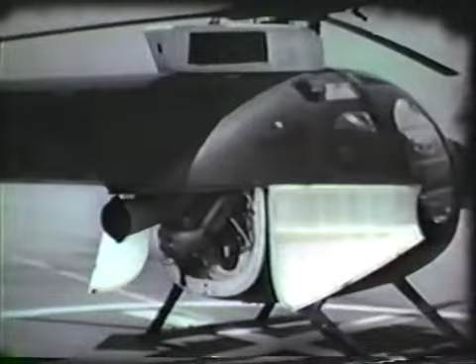The aircraft has clean lines. The teardrop-shaped fuselage is the result of wind tunnel testing to provide minimum drag. Even the landing gear struts have fairings to reduce aerodynamic drag. The clean lines of the OH-6 are part of the reason for its speed and stability. Another contributing factor is the powerful, lightweight turbine power plant.

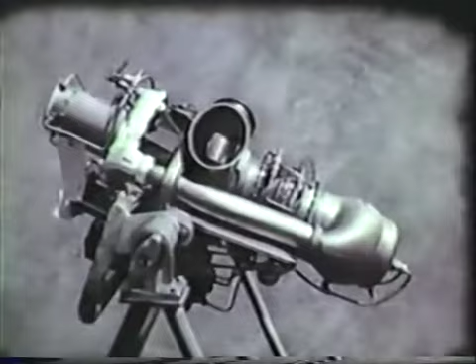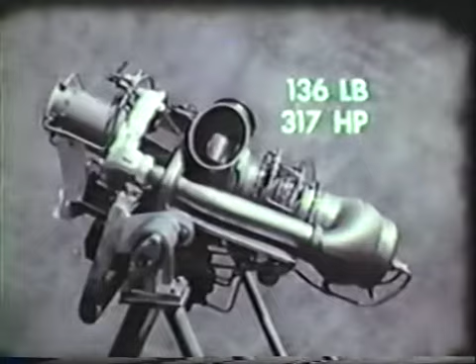The small turboshaft engine weighs only 136 pounds. Its military rating is 317 horsepower, but installed in the OH-6A, it is derated to just over 250 horsepower. This favorable horsepower-to-weight ratio adds greatly to the OH-6A's speed, power, responsiveness, and stability. The engine, like most of the aircraft's major components, can be quickly removed and replaced under field conditions.

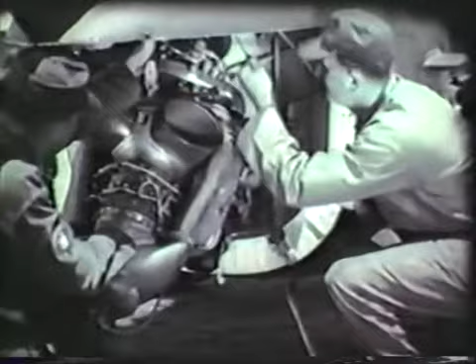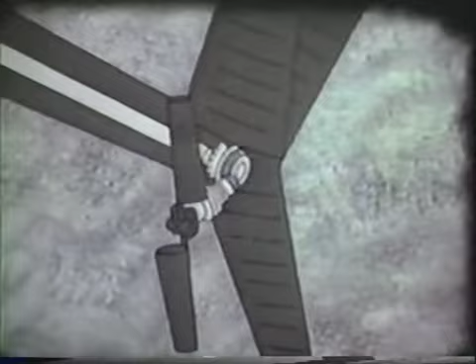The engine's power is not wasted in carrying and operating a heavy and complex main and tail rotor drive system. The engine drives a total of only 4 gears in the main transmission, with 2 gear meshes. In the tail rotor gearbox, there are 2 gears and 1 gear mesh.

The tail rotor drive shaft is one piece, lightweight and dynamically balanced. It has no supporting bearings and no universal joints. The simplicity of the drive system provides light weight, low power loss, and a minimum of maintenance. The 4-bladed rotor system produces high lift with very little vertical vibration and rotor feedback.

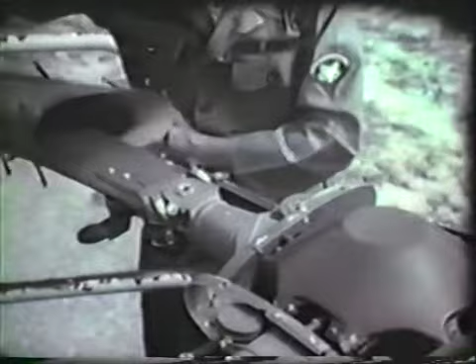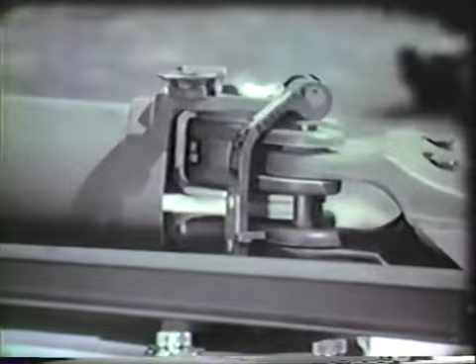The blades are retained on the hub by laminated stainless steel straps. Each of the strap assemblies holds 2 opposing blades. These blade retaining straps have many unique advantages. The principal one is that they provide both flapping and feathering without the heavy joints and thrust bearings used in conventional rotor heads.

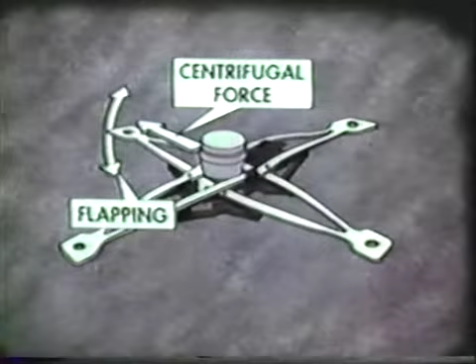Since much more force is imposed by flapping than by the centrifugal force of blade retention, broken straps will usually cause an out-of-track blade condition long before there is any possibility of blade loss. Thus, the blade retaining straps provide full articulation, freedom from joints and bearings, with minimum maintenance required.

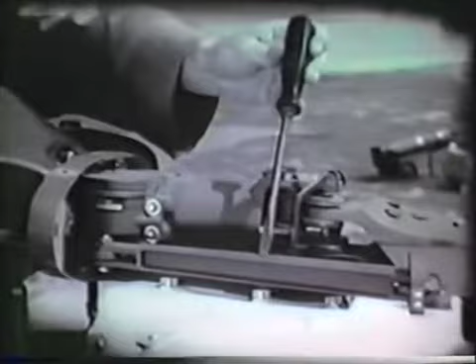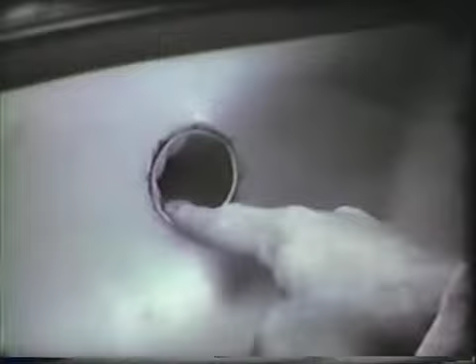Each of the blades has a friction-type damper connected to the blade root through a damper arm and attaching pin. These dampers serve to restrain lead and lag motion and keep the blades an equal distance apart. No components of the rotor head require lubrication, and on the OH-6 there are only 3 sight gauges, one each to check lubricant level in the main rotor transmission, the engine, and the tail rotor transmission.

Before each engine start, the blades and dampers must be rephased by pushing each of the blades forward in the direction of rotation, as the tail rotor is held firmly. This resets the dampers to their minimum friction setting and spaces the blades at equal intervals around the hub. This is also a good time to check the condition of the main rotor blades.

The aircraft has been specifically designed to avoid the need for boost or automatic stabilization equipment. It consists of simple bell cranks and push-pull tubes. No lubrication is required on any of the joints or bearings in the entire flight control system.

On each cyclic control, there is a cyclic trim switch, which is used to electrically adjust longitudinal and lateral trim force. The cyclic system also contains a one-way lock, which resists aft stick movement. On each of the collective pitch sticks, there is an N2 governor trim switch. This switch permits the pilot to control N2 speed within governor range. With engine speed control, cyclic trim, and the cyclic one-way lock to resist rearward cyclic force, the OH-6 is a very comfortable, stable aircraft to fly.

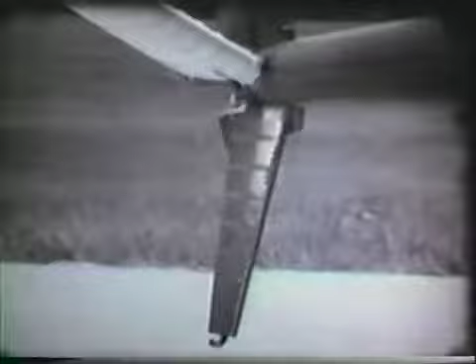The real proof of stability lies in flying the aircraft. Its stability permits hands-off flying in straight and level flight. Yet the OH-6 is agile and handles very much like a well-designed fixed-wing aircraft.

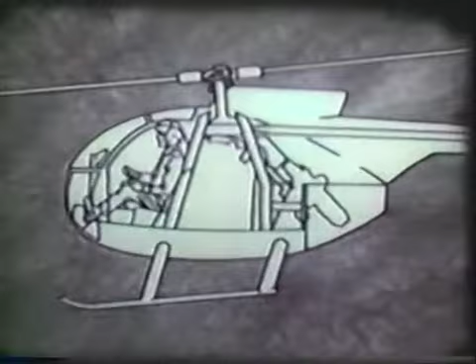Next, let us look briefly at the construction of the fuselage. The primary structure of the OH-6 is a strong central A-frame formed by the bulkheads fore and aft of the cargo compartment. The main transmission and rotor mast are at the top of the A. Thus, the cargo, armament, or passenger load is carried directly beneath the main rotor. Because of this, weight and balance, or CG problems, are seldom critical.

The landing gear struts are connected to the trusses through shock absorbers, which reduce landing shock and transmit the landing gear load to the fore and aft trusses. Beneath the A-frame is a deep keel beam which extends the entire length of the fuselage. This further strengthens the primary structure. The flight compartment seats, as well as shoulder harnesses and seat belts, are attached directly to the primary structure.

The engine is attached to the rear of the A-frame. Thus, all critical components, including the engine, transmission, and rotor mast, seats and pilot are directly attached to the strong A-frame structure. In the event of a crash, the secondary structure is designed to crush and absorb high impact loads, while the outer surface absorbs the impact. The passengers are protected within the A-frame, and the flight compartment is protected from collapse by the height of the A-frame and the forward extension of the keel beam.

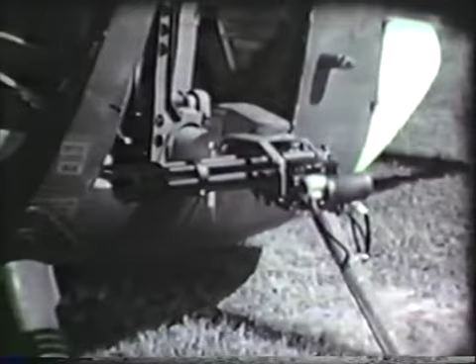The aircraft has provision for mounting armament kits on the left side. The machine gun kit consists of a 6-barrel minigun with selective rates of fire. Ammunition is carried in a narrow box near the forward bulkhead. A mechanically linked gun sight is used for aiming the minigun. The weapon is operated by a trigger and a gun elevation switch on the pilot's or co-pilot's cyclic stick grips.

The OH-6 cargo compartment has provision for 2 folding seats for passengers. Without a co-pilot, seats are available for 3 passengers. However, 2 additional passengers can be carried if the standard passenger seats are not used. With an armament kit installed, a total of 4 passengers can be carried. Though the OH-6 is intended primarily as an observation aircraft, it is capable of performing many utility missions to small units.

The OH-6 requires a minimum of maintenance. All major mechanical units are field replaceable by unit mechanics. But to an aviator, of course, the key question is, how does it fly? We will start at the beginning with hovering flight. As with any turbine helicopter, takeoff to a hover is started with collective pitch full down and throttle full open. While watching the N2 tachometer, the N2 governor is adjusted to operating power turbine RPM. Cyclic control force is trimmed to neutral with a cyclic trim switch.

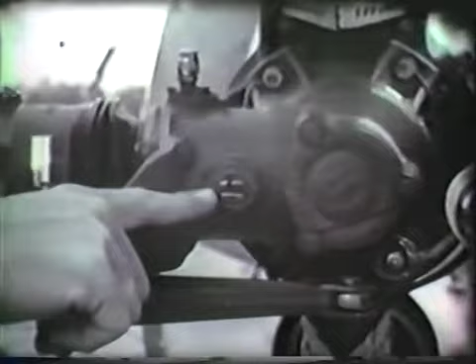Its flexible stainless steel blade retaining straps provide feathering and flapping without bearings or joints. It has only 3 sight gauges: transmission, engine, and tail rotor. It has no hydraulic system, and it has no grease fittings. It has a simple flight control system without boost or ASE.

Its large stabilizers provide longitudinal and directional stability. It can be trimmed to fly hands-off. It is stable and agile, with quick and positive response to flight controls and throttle. Its fuselage is built around a sturdy A-frame and deep keel beam to which all major components are attached.

It mounts a machine gun kit. It responds quickly and easily in hovering maneuvers. It must be hovered sideward and rearward cautiously. With its clean lines, excessive speed can easily be gained. Its takeoff requires no unusual procedure. And its approach and landing is equally simple. It is a small, powerful, highly maneuverable, and very useful aircraft.

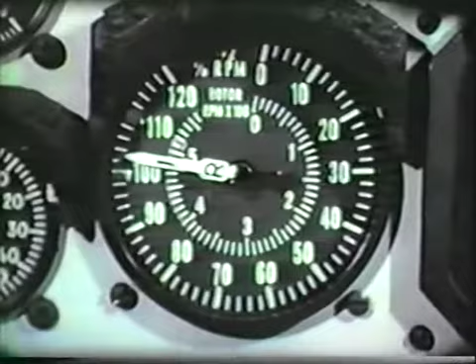We'll cover the fine points in a demonstration takeoff over an 80-foot barrier with the aircraft 50 feet from the barrier. With the cyclic in the neutral position, slowly increase RPM to obtain the desired N2 reading of 103% N2 RPM. When N2 is stabilized, check the rest of the panel. Then make sure that you are clear for takeoff. Be sure to check for aircraft overhead.

Apply collective slowly and smoothly. Avoid any movement along the ground. Continue to apply pitch. As the OH-6 becomes light on the skids and leaves the ground, adjust the cyclic to a 40-knot airspeed attitude. A constant heading is required to attain smooth ascent. Pitch must be adjusted to maintain the desired torque pressure.

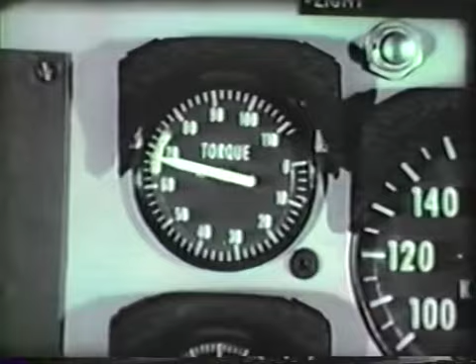In training, maximum performance takeoffs are terminated at about 100 feet. In the field, you terminate as soon as the barrier is cleared by increasing airspeed and adjusting power for a normal climb.

As we watch a maximum performance takeoff, we can readily see that the maneuver differs from normal takeoff only in the fact that a gain in altitude is favored over a gain in airspeed. During the early phase of a max takeoff, before achieving 40 knots, you may not be able to make a safe autorotation in the event of engine failure. For this reason, maximum performance takeoff should be limited to absolute necessity.

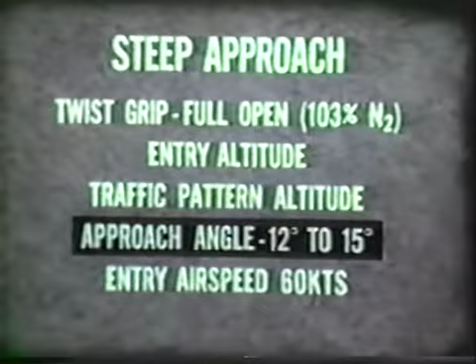For the steep approach usually required in confined area operation, twist grip should be full open. Entry during practice is from traffic pattern altitude. Approach angle is 12 to 15 degrees, and entry airspeed is 60 knots. The angle of approach is the only difference between steep approach and normal approach. Both types of approach are made at an altitude of 300 feet or traffic altitude, and steep approach is initiated at an angle only 4 or 5 degrees greater than normal.

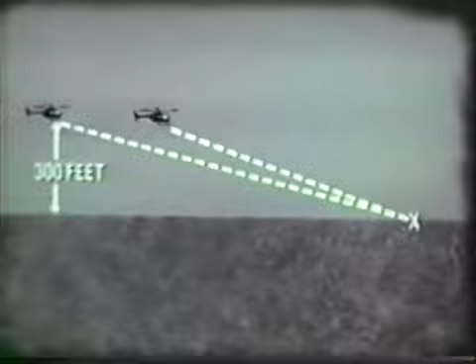With practice, you will learn to recognize the sight pictures for the OH-6. Each aviator will have a slightly different point of view depending on his height. The normal approach, 8 to 10 degrees sight picture, will look about like this. To reach the steep approach entry point, continue beyond the normal approach sight picture until your intended touchdown point looks about like this. To make this steeper descent, a greater reduction of collective pitch is normally required.

Airspeed should be kept as close to 60 knots as possible. A straight angle of descent is maintained by adjustment of collective. The helicopter may be crabbed to maintain a straight ground track above 50 feet. When you reach the point where ground speed and rate of closure seem to increase, adjust airspeed to the pace of a brisk walk. Maintain this rate of closure until translational lift starts to decrease. Apply power to compensate the loss of lift and gradually reduce forward speed to come to a halt on or above the intended touchdown point.

Steep approach differs from normal approach only in angle of descent. The steeper angle of descent requires closer monitoring of rate of descent and rate of closure. You will need proficiency in these two maneuvers before you can undertake confined area operation. And in confined area operation, you must also be able to evaluate the area and plan every move you will make in getting into and out of it.

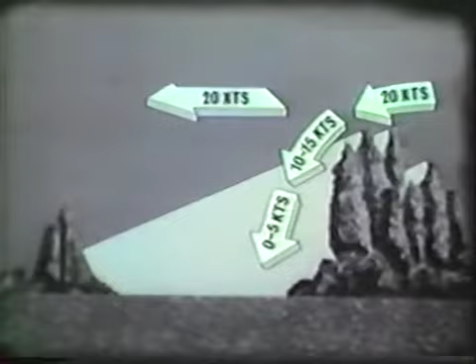One more wind factor which must be taken into account during high reconnaissance is a phenomenon called lee effect. Lee effect could be a problem in this landing area if the wind were in this direction over the tall trees. Out from the dense tree barrier is a wide area which is in the lee of the wind. In this area, the wind is masked or blocked. Although there may be a 20-knot wind above the trees, the wind at ground level is nearly calm.

Making a normal to steep approach will be tricky. If the sudden drop in wind velocity is anticipated, it can be compensated for without difficulty. If it is not anticipated, the sudden loss of 20 knots of effective airspeed could cause falling through or loss of control.

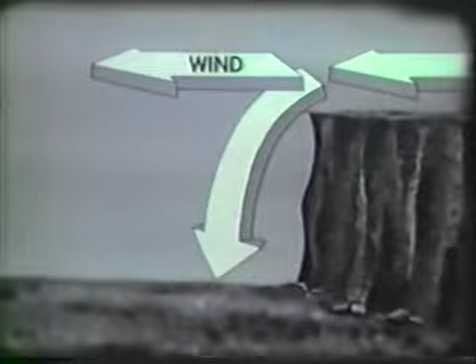While tall trees can mask the wind, steep hills or tall buildings may have a considerably more noticeable lee effect. On the lee side of a hill, the effect can cause a marked downdraft, which is particularly dangerous in the initial phase of a takeoff or the final phase of landing.

In high recon, you must consider wind, terrain, and barriers. You must plan your approach and takeoff paths. Takeoff should be visualized before landing. Final takeoff plans can wait until you're on the ground, but you must be sure you can take off. You must also consider your aircraft's gross weight. You must know the actual weight to properly evaluate the situation. In confined areas, the fuel load, equipment, and passengers must be kept within minimum safe limits.

When all of the factors in high reconnaissance have been considered and a firm plan has been formulated, approach is undertaken. It may vary from normal to steep. Approach should never be any steeper than necessary to clear barriers. During approach, you perform your low reconnaissance.

Low reconnaissance starts as soon as you are able to clearly see the landing site. It continues until you are sure that you can land according to your previously made plan. If at any time during the approach you are in doubt that you will land successfully, don't wait to find out. Make a go-around. If high recon has been well executed, low recon should give you no surprises. Touchdown should be smooth and right on the previously planned spot.

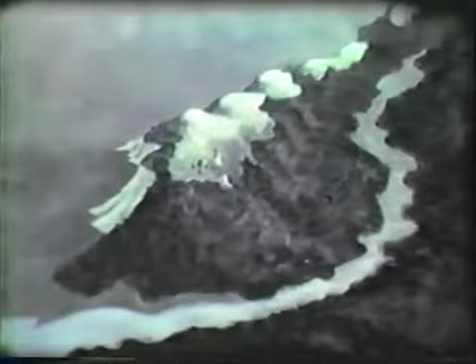Here is another type of advanced flying which will test your skill: pinnacle and ridgeline operation. First, let's define pinnacle and ridgeline. A pinnacle may be a mountain peak with the terrain falling away for thousands of feet on all sides. A pinnacle can also be a small but steep hill. Whatever its height, a pinnacle landing site is a small site where the terrain drops away abruptly on all sides. A ridgeline is an area where the land falls away on one or two sides, such as a bluff, a precipice, or a saddle.

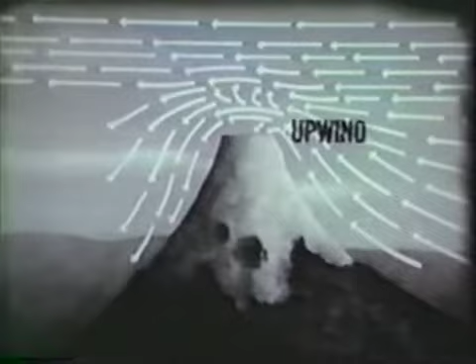Ridgelines and pinnacles present a landing problem, primarily because of the effect which they have on the wind. Wind from any direction must flow up one side and then down the other. On the pinnacle, there is an area of severe turbulence at the upwind edge, where the wind rolls over the top of the slope. At the downwind edge, there is a severe downdraft where the wind falls over the downward slope. All across the pinnacle surface, the wind is turbulent and inconsistent in velocity.

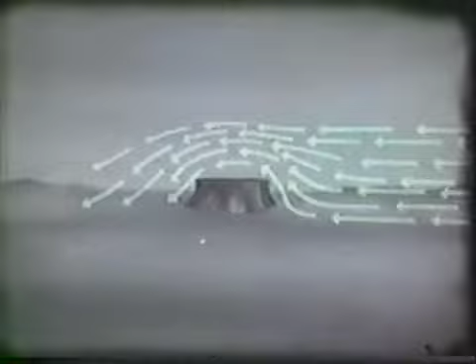On tall mountain pinnacles, the wind blows almost continually, with practically no periods of calm. Winds at these heights frequently have very high velocity. Though lower pinnacles are not so subject to continual high-velocity winds, the wind pattern is just the same. On the hill's pinnacle, there is an updraft on the windward slope, turbulence at the upwind edge, turbulence and inconsistency across the top, and a downdraft at the downwind edge. Obviously, it is important to know the wind direction and velocity in pinnacle operation.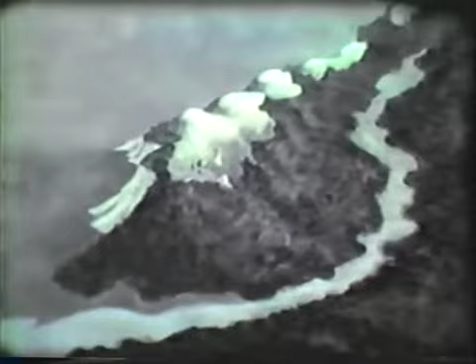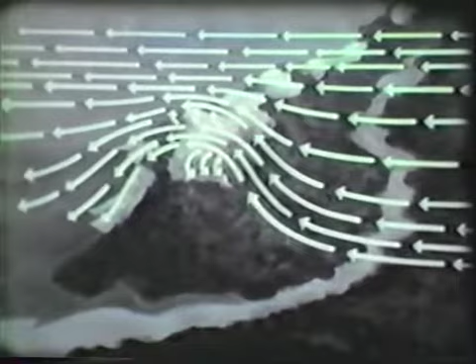The effect of wind over a ridgeline will vary with the wind's direction, but when wind is across the ridgeline, the effect is much the same as on a pinnacle. Generally, the effect is not as violent. In pinnacle and ridgeline work, it is important to learn to visualize the pattern formed by the wind so that you can avoid its violent effects. For example, you would not climb to a pinnacle or ridgeline from the downwind side. The downdraft would make flying difficult, if not dangerous. A climb on the upwind side would give you the benefit of the updraft.

High reconnaissance should be made with sufficient altitude to avoid the turbulence. After estimating wind velocity, try to form a mental picture of the pattern of eddies, updrafts, and downdrafts the wind is forming in the area. Without these erratic air currents, landing on a pinnacle would be no harder than landing on an airfield.

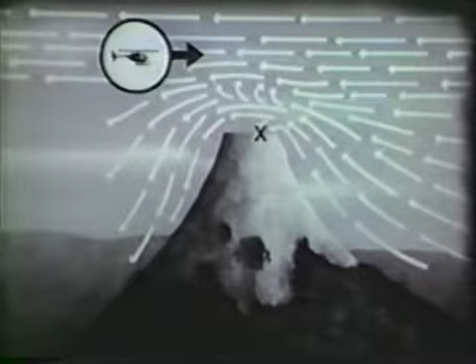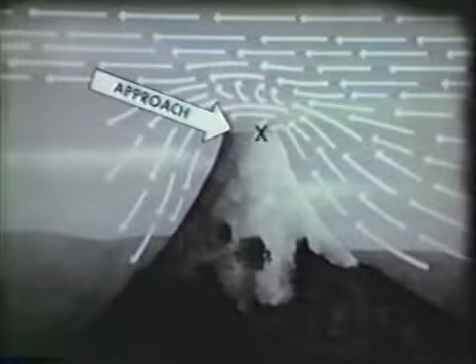Select a landing site as far as possible from the turbulence at the upwind edge and the downdraft at the downwind edge. Angle of approach depends on existing conditions: the wind velocity, density altitude, gross weight, and availability of forced landing areas. Approach angle may be anywhere from shallow to steep. It should be remembered, however, that a shallow to normal approach provides greater control of the helicopter.

On pinnacle landing, low reconnaissance should be very thorough. Don't hesitate to abort it if your landing site is marginal. If the surface is rough or uneven, let the weight of the helicopter down gradually and with caution. An airspeed over altitude takeoff is made since you automatically have adequate altitude as soon as you clear the edge of the pinnacle.

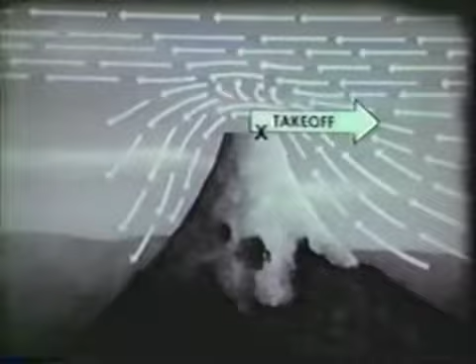Pinnacle and ridgeline operation, as well as confined area operation, are the type work which only a helicopter can do. Your skill will depend on your ability to plan and to control your aircraft in all situations. Maximum performance takeoff and steep approach are two maneuvers which provide an excellent opportunity to improve your ability in the OH-6.

In confined areas, remember that each situation presents a new set of problems. The problems can only be dealt with safely by planning each step with care and by being continually ready to pull up and make a go-around. Pinnacle and ridgeline landing calls for an ability to see the wind and to make the wind work for you rather than against you. With its powerful engine and excellent aerodynamics, the OH-6 is capable, provided the aviator at the controls is equally capable. Diligent practice can give you the ability.

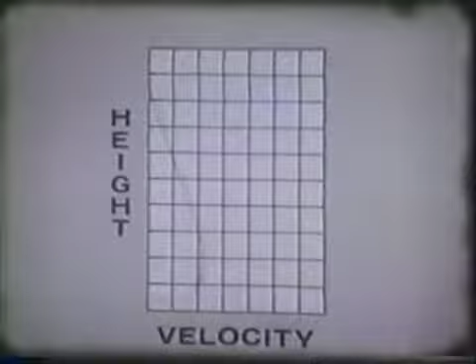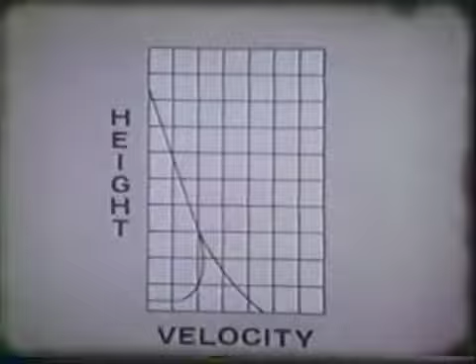The curves on these charts are different for various gross weights and density altitudes, but we will show typical curves. The curves divide the chart into 3 areas. The areas might be called safe, caution, and danger conditions. Sometimes the ascending altitude over airspeed curve is called the dead man's curve, but the danger area is not necessarily fatal. Ascents can be made straight up in the OH-6, but pilot technique and control response would have to be excellent if the engine failed.

We can also see that a takeoff cannot be made without passing through the caution area. An engine failure would call for quick and proper response. On the height velocity chart, we can visualize why there is only one safest airspeed altitude combination for takeoff. From a takeoff point on the ground, there is only one shortest route to the safe area where an autorotation is easiest. Any other combination of airspeed and altitude will keep you in the caution area longer.

With the high power available in the OH-6, there's a temptation to pull pitch and climb out like an express elevator. The thrill is expensive in fuel, maintenance, and safety. There is also the possibility of a fast airspeed over altitude takeoff. If you must leave the immediate vicinity in a hurry, this is the way to do it. But you'll have your hands full making a safe landing if your engine fails.

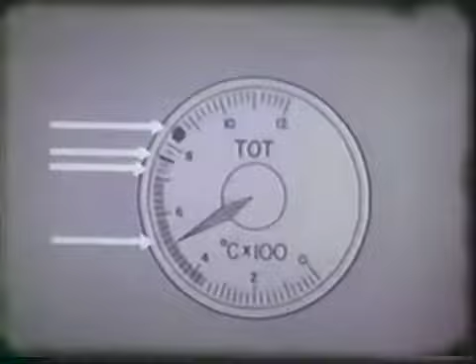In all phases of flight, the OH-6, like every other aircraft, has specific operating limitations. These limitations are clearly indicated on the aircraft's instrument panel. The engine instruments are grouped on the panel to simplify monitoring. As on all aircraft, the gauges are marked with green to show the normal operating range, yellow to indicate the cautionary operating range, and red to indicate the maximums or minimums which should be observed. On all turbine engine aircraft, it is mandatory that the engine instruments be monitored frequently, an overspeed or overtemp can cause complete engine failure.

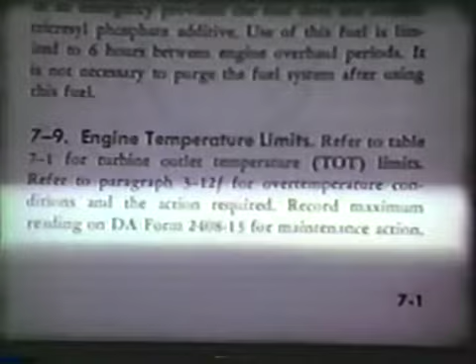In the Dash 10, Chapter 7, Operating Limitations gives the specific details for every flight situation. You should be completely familiar with this chapter. Each of the paragraphs includes a very important instruction. If these limits are exceeded, record maximum reading on DA Form 2408-13 for maintenance action. These few words must be respected and complied with.

Reporting over-limits operation is more than mandatory. It can save your life or the life of anyone who uses the OH-6 after you. Unreported damage can progress to complete failure at any time. It's like leaving a bomb under the seat. Proper reporting and the recording of specific details will assure that action will be taken to be sure there is no hidden damage.

When you're responsible for an aircraft engine which develops thousands of RPM and hundreds of degrees of heat, you must monitor often. Trouble isn't frequent, but once started, it can become serious very quickly.

In maneuvering the OH-6, you will find that it is a stable and responsive aircraft. The flight controls have good response in maneuvering flight. But because control response is fast and somewhat abrupt, you may have a tendency at first to over-control. Over-controlling, cross-controlling, and poor control coordination can lead to serious difficulties, especially at low altitude.

The OH-6 has very clean lines. Its fuselage can move through the air in any direction with low drag. In normal attitudes, this is a real virtue, but in an unusual attitude resulting from poor control coordination with too little power, the OH-6 will sink very rapidly. This is not a fault in the aircraft. The hazard of high sink rate exists in any helicopter which is flown with poor coordination and inadequate power.

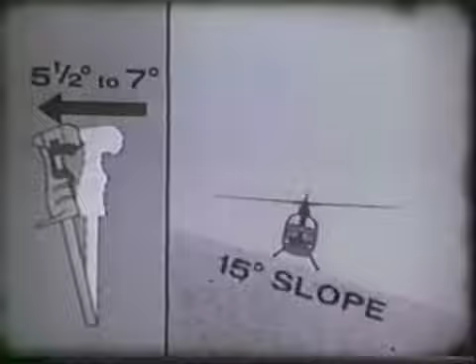Downslope landings must be executed with care to avoid damage to the lower vertical stabilizer and tail rotor. Downslope must not exceed 15 degrees. Lateral cyclic travel to the right is limited to 5½ to 7 degrees. Lateral slope landings also must not exceed 15-degree slopes. Lateral cyclic travel to the left is limited to 6½ to 8 degrees. Caution must be exercised on all slope landings.

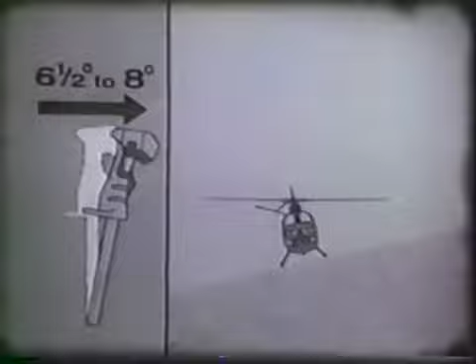Much of the OH-6's ability to operate on sloping terrain is derived from the landing gear struts. Caution should be used when centering the cyclic, because this extends the upslope strut and increases the tilt of the aircraft.

In fine weather, flying the OH-6 is quite simple. Although it is not equipped for instrument flight, most weather problem areas can be overcome, provided common sense and prescribed flight limitations are observed. Let's run through the list of common weather hazards. All of them are familiar to experienced aviators.

Moderate precipitation, a gentle rain or snow, has no effect other than to reduce visibility. Flight altitude should be sufficiently above the terrain to avoid obstacles, but low enough to maintain positive visual contact with the ground. The OH-6 is not equipped for IFR operation. In very heavy precipitation, flight should be postponed until safe takeoff and landing are assured. Precipitation makes flight more difficult. It only prevents flight when it is excessively heavy.

Study the OH-6 height velocity chart. With it, you can determine the short route to safe height and airspeed. Become thoroughly familiar with the operating limitations of your aircraft, and don't underestimate the importance of reporting overspeeds, overtemps, and hard landings. The OH-6 controls provide smooth response when properly handled. But over-controlling, cross-controlling, or inadequate power are just as dangerous as in any helicopter. You can't do anything about changing the weather, but you can learn when to fly and when not to fly.

The basic rule for avoiding critical flight conditions is simple. Fly by the book. Follow all recommended procedures no matter how much experience you gain or how familiar you become with the aircraft. Learn the rules about height and velocity, calculating gross weight, handling the aircraft in foul weather. Learn all the rules and adhere to them each time you fly.

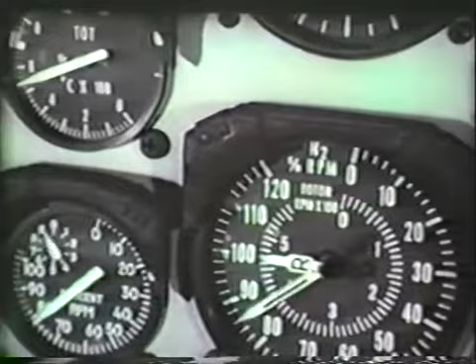The OH-6 gives you plenty of warning when the engine quits. A change in engine sound may be detected first, but a decrease in torque and RPM may be the first change noted. When N1 falls to 55%, the engine out warning light flashes, and a beeping tone is heard in your headset.

Engine failure without warning is a rare occurrence. When it does occur, immediate establishment of an autorotation is standard procedure. An engine restart should only be attempted if you have adequate altitude and you are sure you can restart the engine. In this film, we will learn about autorotation and other emergency procedures in the OH-6. In training, you will practice basic autorotations heading into the wind from a specified standard altitude at an entry airspeed of 100 knots. With an actual engine failure, these conditions may not exist. We will see how other situations are handled later.

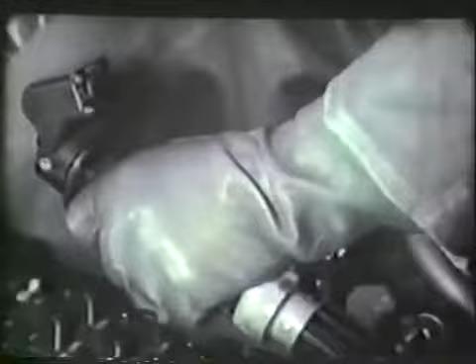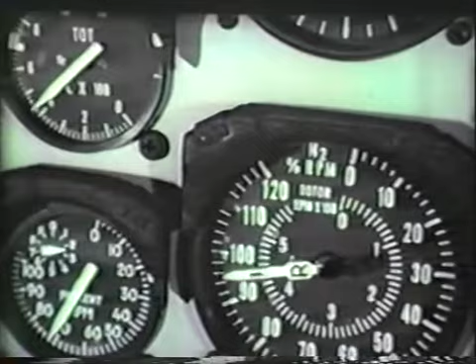Autorotation is entered by reducing collective pitch and simultaneously rolling off power to the flight idle detent. As power is reduced, heading is stabilized by trimming the pedals, and a deceleration to 60 knots is achieved by applying aft cyclic control pressure. Rotor RPM and N1 readings must stay within acceptable limits. Throughout the descent, monitor the rotor RPM and gas producer frequently. Maintain 60 knots to an altitude of 50 to 75 feet.

Then start to decelerate by applying additional aft cyclic pressure. Pressure must be applied properly. Too abrupt a movement will cause the OH-6 to climb. Too slow a movement may fail to reduce rate of descent. Gradually increase aft cyclic pressure to further reduce airspeed.

When the aircraft is 10 to 15 feet from the ground, apply sufficient collective pitch to slow the rate of descent. Near the ground, apply additional collective pitch to cushion your landing. Maintain heading with the pedals.

In addition to basic autorotation, you will practice 180-degree and precision autorotations. This training will prepare you to handle an engine failure in any flight situation. Engine failure can occur at a hover, during climb out, at low altitude and high speed, or during normal flight.

Dealing with engine failure at a hover is quite simple. The principal thing to remember is not to increase or decrease pitch. Leave pitch at the setting used for hovering as you apply right pedal to compensate for rapidly decreasing torque. Prevent drift over the ground with cyclic control adjustments.

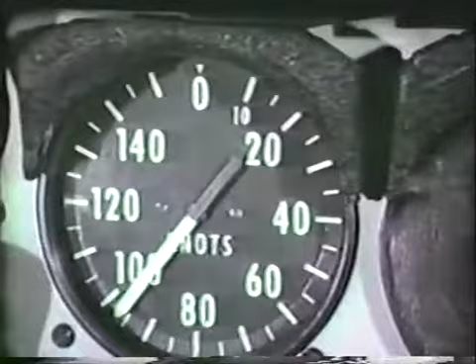During the climb, collective pitch should be gradually reduced so that pitch is full down when the climb is terminated at 60 knots. Care must be taken not to permit rotor RPM to exceed limits during or following the climb. Sufficient altitude will be gained in the climb to permit a normal autorotation with a fairly wide choice of landing sites.

At low altitude and high airspeed, with a favorable wind and weight, it is feasible to climb 200 to 300 feet after engine failure. With engine failure during normal flight, an autorotative descent and landing is made. The fuel valve should be pulled and all electrical switches off, except when the landing light will be needed.

In autorotation, the gliding distance and rate of descent of the OH-6 is very favorable when compared to other present-day helicopters. Despite this excellent capability, it is not always possible to land in an ideal area. Two less desirable alternatives are possible: landing in trees and ditching in water.

A tree landing, properly executed, is not excessively hazardous to personnel. The principal requirement is cool and capable management of the descent. Choose carefully and select an area where the trees are fewer and smaller. At treetop level, zero your ground speed and permit the helicopter to settle. With capable handling, you can settle between trees rather than in a tree.

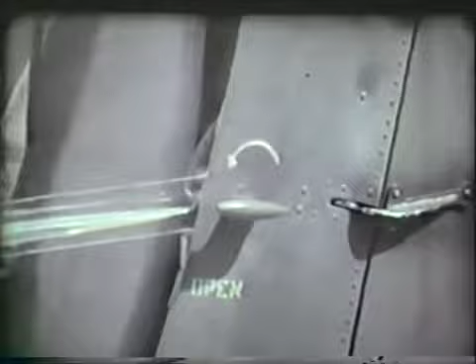You next move the aircraft well away from the personnel in the water. If the co-pilot's door is unlatched, it should be firmly secured to provide as much flotation as possible. After the battery and generator switches are turned off, lock your shoulder harness, then jettison the pilot's door.

With your escape route ready, cut off the engine by turning the twist grip to the fully closed fuel cutoff position. As the engine dies, increase pitch to maintain the aircraft just above the water. With pitch full up, the rotors will decelerate and the OH-6 will settle into the water. As water contact is made, bottom the pitch.

This is very important. If the blades are not at minimum pitch, they will skip off the water as the aircraft is rolled to the left. Left cyclic is applied to dip the blade tips into the water. With minimum pitch, they dig in and stop without skipping.

As soon as blade rotation is stopped, climb out and move away from the aircraft as rapidly as possible. The aircraft will sink quickly, and there will be considerable steam and noise as the hot engine contacts the water. We can readily see why.

Ditching without power is executed in exactly the same way, except that an autorotation terminating at zero ground speed is made to hover altitude. All personnel, crew, and passengers must remain strapped in until blade rotation is stopped. Fortunately, the exceptional autorotative glide range of the OH-6 makes ditching a rare necessity.

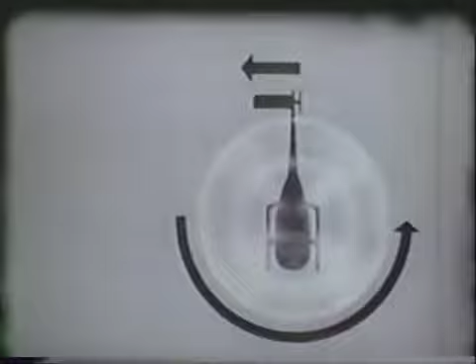Tail rotor failure is not a common occurrence either, but you should know how to deal with it. There are two forces which prevent main rotor torque from rotating the fuselage of a single rotor helicopter. One is the counteracting force of the tail rotor. The other is the streamlining effect of the relative wind passing over the fuselage. For streamlining to be effective, the power setting which induces torque in the rotor plane and the airspeed must balance.

If the airspeed is sufficient and the power setting is not too great, the fuselage will not rotate, even though the tail rotor is ineffective. This balance between airspeed and power setting is the key to managing tail rotor failure in flight.

You may not even be aware of tail rotor failure immediately. The first indication may be a lack of response to pedal movement. The pedals will be completely ineffective. The aircraft may yaw to the right, but flight can usually be maintained as long as torque and airspeed are kept in balance to prevent excessive yaw.

When powered flight cannot be maintained, auto-rotate immediately to a suitable site, preferably upwind. As soon as you reduce power to flight idle, yawing will decrease greatly. Normally, however, you can continue powered flight to a suitable landing field.

When you reach the landing area, make a full auto-rotation landing into the wind. Maintain 60 knots indicated airspeed and keep turns to a minimum. On a level surface, make a running landing into the wind with a touchdown airspeed adequate to keep the yaw at a minimum.

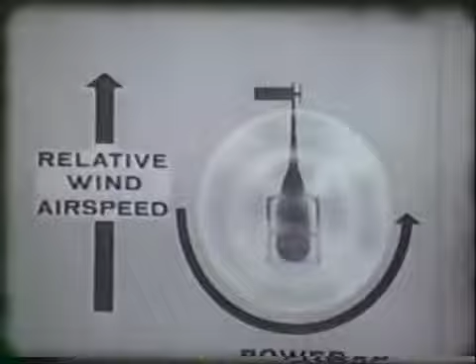With tail rotor failure at a hover, you will not only lose the torque counteracting effect of the tail rotor, but you will have little, if any, relative wind and no airspeed to prevent rotation of the fuselage. Tail rotor failure will cause a sudden yaw to the right, which, if allowed to continue, will cause rotation or spinning of the aircraft. Act immediately by turning the twist grip to flight idle and make a hovering auto-rotation.

Since the fuselage may continue to rotate slowly to the right, use collective pitch carefully to cushion your touchdown as much as possible. Damage and injury can be avoided by expert control manipulation, even though the tail rotor controls are completely ineffective.

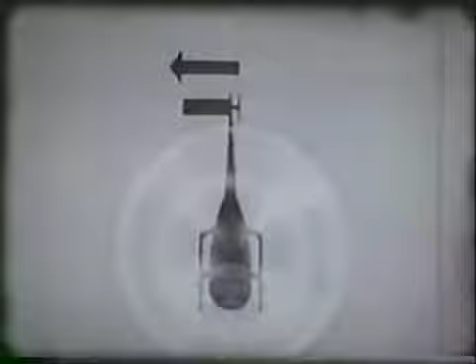So far, we have only discussed tail rotor failure. Tail rotor control malfunction is also possible. In a control malfunction, the tail rotor continues to deliver thrust, but the degree of thrust cannot be controlled due to a break or jamming in the tail rotor control system. Normally, when this occurs, the pitch setting at the moment of malfunction will remain fixed in the tail rotor.

Thus, there are three possible tail rotor fixed pitch conditions. If control malfunction occurs in a high power situation, as in takeoff, the blades will be fixed near full pitch position. In a low power situation, such as approach, the blades will be fixed near minimum pitch. At a normal cruise power setting, the blades will be fixed at an intermediate degree of thrust.

Since tail rotor control malfunction has so many variables, we can't give specific solutions. In general, however, with failure at full pitch, difficulty will be noted only when power is reduced. Therefore, do not auto-rotate. Proceed to an airfield and make a powered landing. Incidentally, with a full pitch malfunction, the OH-6 will yaw to the left when power is reduced.

At minimum pitch, with a tail rotor control malfunction, do not increase power. This would cause a severe yaw to the right. The best solution is to auto-rotate immediately.

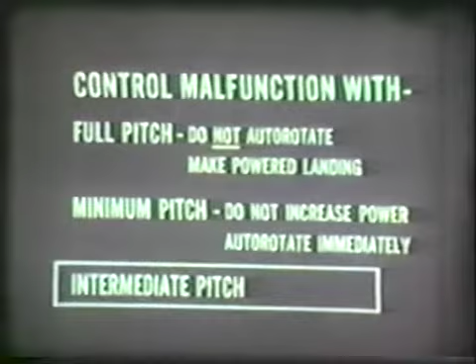With a malfunction at normal cruise and the tail rotor at intermediate pitch, the aircraft's reaction will be similar to a full pitch malfunction, but not as critical. It is probably best not to auto-rotate. Maintain airspeed to reduce yaw and make a powered landing. Some side slip should be expected when power is added during landing.

Tail rotor control malfunction is a serious emergency. It calls for ability to immediately analyze the situation, to take appropriate action quickly and calmly.

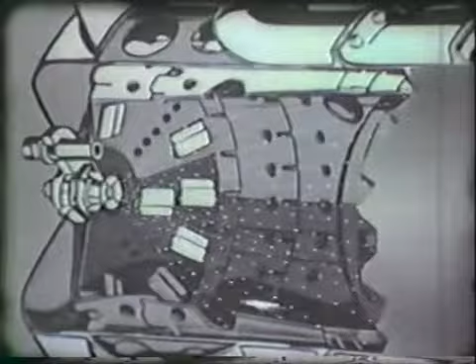Fire is also an emergency which calls for a calm attitude. It is a rare occurrence in well-maintained and inspected aircraft. The most common type of fire is engine fire during starting. A malfunction may cause raw liquid fuel to accumulate in the combustion chamber. Normally, such fuel should escape through a drain provided in the bottom of the chamber. If the engine is hot, this fuel may ignite, or it may ignite when normal ignition takes place.

No serious damage will occur provided proper corrective action is taken promptly. Immediately roll the twist grip to the fuel cutoff position and continue to motor the engine with the starter button. At the same time, pull the fuel valve to closed. As soon as all of the liquid fuel is consumed, the fire will go out. Another starting attempt should not be made until the cause of the malfunction is determined and corrected.

It is also possible for engine fire to occur in flight. This might be considered a special type of engine failure, and the same procedure is used. If power remains available, powered flight may be used for 2 or 3 minutes to reach a suitable emergency landing site.

Fuselage fire and electrical fire may also occur, and the procedures used are those used in any aircraft. With a fuselage or cargo fire, use the fire extinguisher, and if the situation is serious, land immediately. With electrical fire, check the instruments to attempt to locate the faulty circuit. Then pull the appropriate circuit breakers. Snap off the battery and generator switches, and land as soon as practical. To clear smoke and fumes from the aircraft, open the rear air ventilator and rear cabin doors.

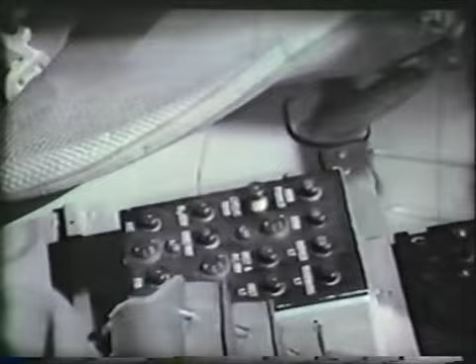It is possible for either of the cyclic trim actuators to develop a switch failure or short circuit. This would cause excessive and unwanted trim force, either fore or aft or to one side. The cyclic trim circuit breaker should be pulled to stop any further movement of the defective actuator. Flight may be continued by simply increasing the force applied to the control stick to override the out-of-balance trim condition. The aircraft can be flown with a defective one-way lock or trim actuator. Flight need not be terminated.

Now let's review what we have learned about emergency procedures. Auto-rotation in the OH-6 calls for no new or unusual procedures. The aircraft has an excellent glide range and minimum rate of auto-rotative descent. Engine failure at a hover, during climb out, at low altitude and high speed, or during normal flight, all call for conserving of rotor RPM.

Landing in trees and ditching are both last resort actions. If landing in trees is necessary, carefully select an area where the trees are smallest and furthest apart. Just above the trees, zero your ground speed and settle in between trees rather than in a tree.

Ditching should be accomplished only when it is absolutely impossible to reach land. In ditching, control of the aircraft must be retained so that the rotors can be stopped before the fuselage submerges. Personnel that do not jump before water contact must not leave the aircraft before the rotors have stopped.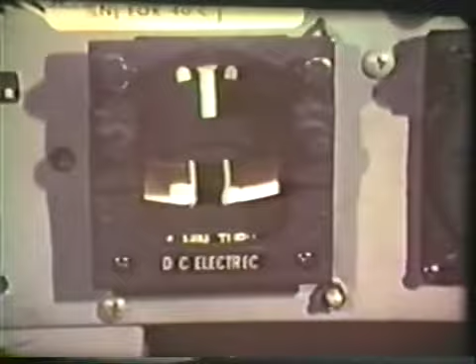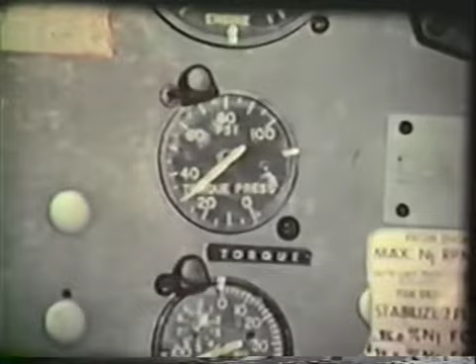It goes without saying that in a situation such as inadvertent IMC, some of these instruments are not as important to aircraft control as others. The suddenness of inadvertent IMC will not allow the aviator to establish a complete scan. A pilot must learn to cross-check the most critical instruments first. Step by step, he must use the attitude indicator to level the aircraft, then the heading indicator to maintain selected heading. Once established, by reference to the torque meter, he now adjusts to climb power. And finally, the airspeed indicator to make certain he is established in forward flight with airspeed stabilized. This procedure describes the first C in our recipe, control.

The second C, coordination, is taken care of at some time before the flight. It must be established beforehand that the pilot at the controls will concentrate primarily on flying the aircraft on instruments. The co-pilot will monitor the instruments and advise when visual conditions are again encountered. Clearance. Make sure you have adequate clearance above the highest obstacle. This is also covered in the step-by-step procedure when a straight controlled climb is established. Another recipe ingredient, course, is included in the procedure when you make certain you are maintaining the correct heading.

The final C, call, is accomplished only when the immediate action steps have been successfully completed and you're ready to begin executing your established inadvertent IMC recovery plan. As a minimum, the 5C procedure, which evolved from combined research and operational experience, should definitely be included in your unit training program. The time to plan for an encounter with inadvertent IMC is before, not during the encounter. The 5C procedure is easy to remember and could be well worth the time it takes to do so. Think about it.